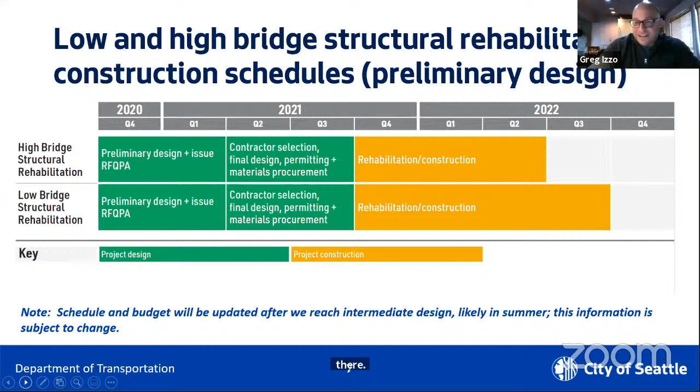Nothing changes as far as the back end of that schedule as well. I just wanted to mention on the back end, nothing changes.

Greg, before you jump in, there's a question in the chat about the contractors being bound by a timeline. What happens if something is discovered that upends this timeline? And are there any incentives for them to finish early? So how do you manage timelines overall?

So how we manage timelines is we direct the deadlines as far as the schedule and all the timelines that the contractor needs to meet. They're part of the specifications, part of the requirements that we put in our specifications that the contractor puts a price on and a proposal on. So we drive a lot of those timelines.

As far as the second question, I'm not sure if I answered that fully. There was another part of that question I may have missed. What happens if something's discovered that upends the timeline? That's happened. So what happens if something unexpected occurs?

Well, obviously there is always a risk of something happening, especially if there is a protest, for example. If we have a selected contractor and there is a protest, that's obviously going to need some time, and this is why we're moving so carefully and methodically through the process, to eliminate or at least minimize the risk of something like this happening. We at SDOT have been through this many, many times as far as bidding projects like this, as well as with GCCM and our experience here.

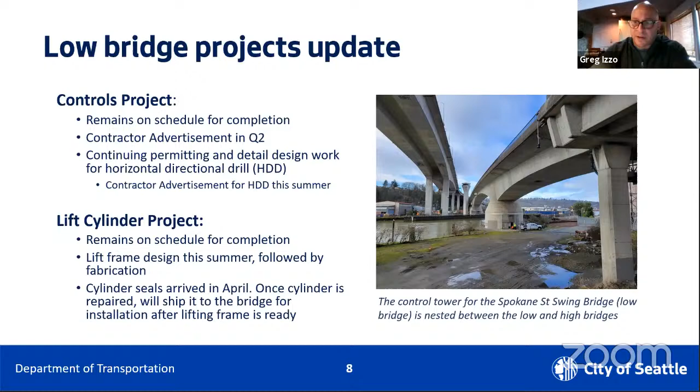And Greg, just as a follow-up, there was a question from Dan Austin about how long it takes a standard protest to settle. I missed that when you were finishing up that piece of it, but maybe you could, in your experience, say how long it typically takes to settle a protest.

Protests can vary, again, depending on the standing of it, the grounding of it. It can take between a month to 2 months or 3 months to resolve, depending on, I guess again, the grounding of it. So it's time - it's nothing that takes only a week or 2 weeks. We would expect something like this to take at a minimum probably a month or so to get resolved.

Thank you, if it should happen. Yeah, and can I just note, sorry to barge in here, but this is one of the reasons why we have to be so careful and deliberate as we go through the process of selecting a contractor. We want to make sure that we fend off any grounded protests. So if anybody wants to know why it takes so long, it's because we're actually trying to save time.

Okay, I keep moving, Greg. I think, yeah, next slide.

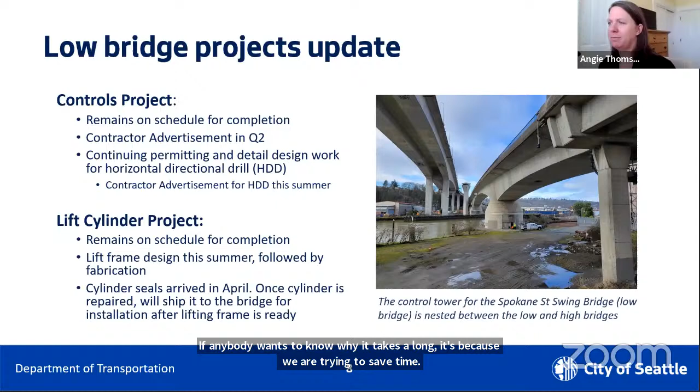Okay, this shows low bridge improvement projects. Again, the low bridge controls is going to be advertised any day now within the next week. So we want to get that out there because it does have a long procurement and testing period. So we want to get that underway.

But again, the back end of the schedule remains. The low bridge communications, again, most of the time is spent on the design and permitting, which is underway right now, but we are planning to advertise this one late summer. It's a short working day contract, so we don't expect the working day contract to take very long, but it's the permitting that takes the time here.

And then as you can see, the cylinder project seals and repairs continuing, but that critical path nature of the design and procurement of the lifting frames is going to be very important. We want to make sure that keeps moving along and the fabrication gets done quickly. So our eyes are on this one because it could drive the schedule on the back end.

So, but all in all, fourth quarter and toward the end of the year is when we're looking at wrapping all these projects up. We do have tools that we're looking at right now, in case we get caught up with any of these projects, just being able to find ways to perhaps accelerate and save some time through the schedule. So we're looking into that right now and investigating that.

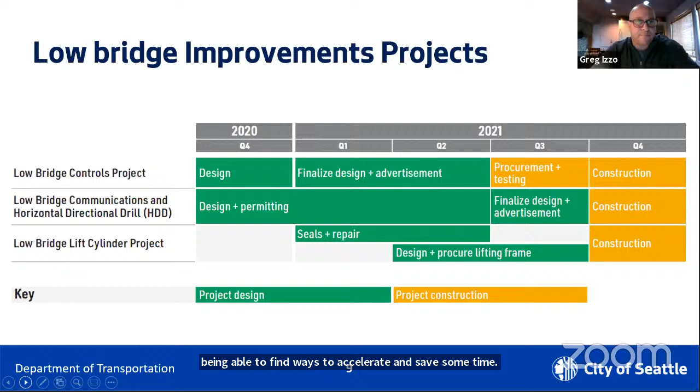Okay, emergency vehicles. I know this question has come up in the past as to why emergency vehicles couldn't use the high bridge in its current state of repair. There's no easy answer to this because it's very complicated in nature.

Whatever vehicles do use this bridge need to be in a controlled fashion. I'm talking about maintenance and construction vehicles, vehicles that we know at a planned occurrence are going to be on the bridge. We can monitor it very closely, including the speed as well as the location on the bridge of where these vehicles go. So a few things here I wanted to bring up.

Each end of the bridge is locked to prevent unauthorized access at this point. So we would have to manage that access if we were to allow emergency vehicles, which presents some other issues operationally and from a cost standpoint, as well as safety, since we have multiple contractors up there. Phase 1 repairs stabilize the bridge, but not to a level where it can take live traffic without the risk of additional cracking.

Just talking to the engineer of record, a lot of tensile stresses are created by introducing live load to this bridge at this point, beyond the areas of the stabilization design. So we don't know how the bridge will behave beyond those points. It's a risk we would take introducing live load, especially at higher speeds with emergency vehicles, because the higher the speed, the more impact load on the bridge, and that impact load could increase stresses as well. So it's a very delicate area.

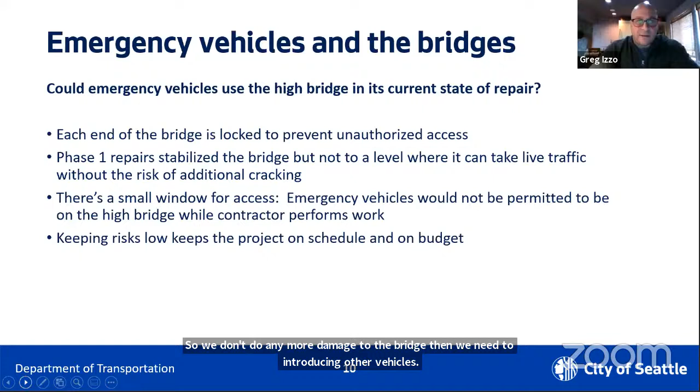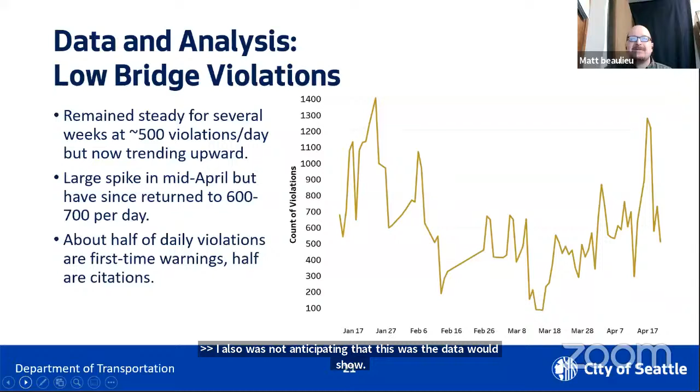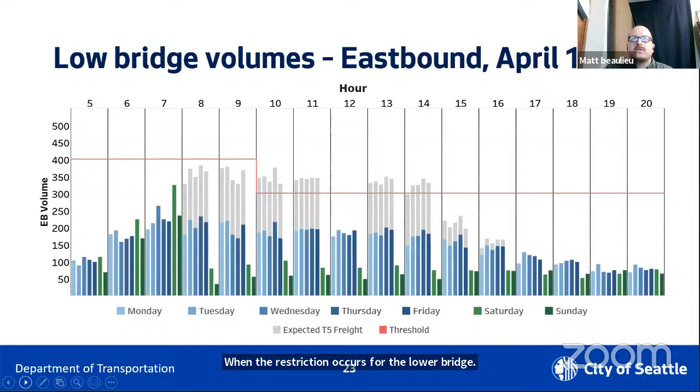So as we jump forward, unless there are more questions. Eastbound, we're seeing a not-surprising morning increase in volumes during the 5, 6, 7 o'clock hours continuing. It's worth noting the green bars on this graph show that morning spike prior to the change in time when the restriction occurs for the low bridge, so people are taking advantage of those extra hours provided by our recent changes. This also shows us that in the eastbound direction, with the Terminal 5 volumes as projected, we're looking at being a little bit beyond what we're confident we can handle.

So that leads well into the question of what comes next, which I believe Maureen was going to take from us on slide 24, unless there are questions.

Thanks, Matt. Operationally, we have those daily and monthly numbers of trips that we can adjust upwards and downwards. We're going to be monitoring the data very closely, and also preparing for future changes coming in January 2022. We're going to start some outreach and engagement to try to get a better understanding of how those changes are going to impact people, and then come back to you all with more information.